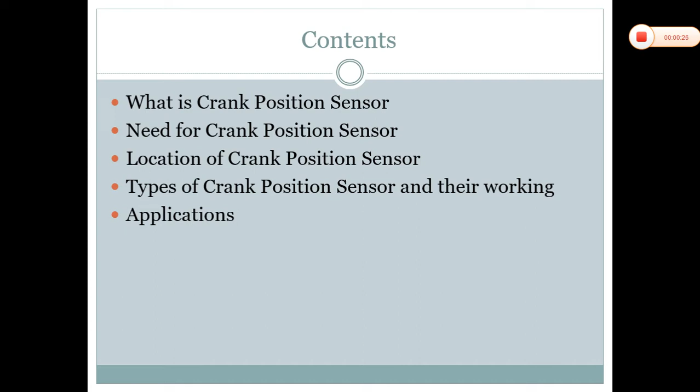So, what is a crank position sensor? A crankshaft position sensor is an electronic device used in an internal combustion engine to monitor the rotational speed and the position.

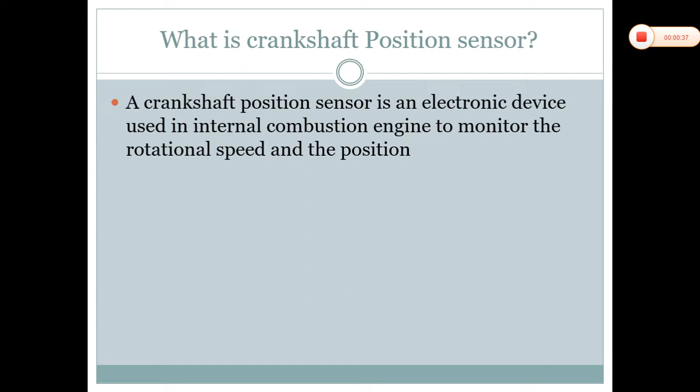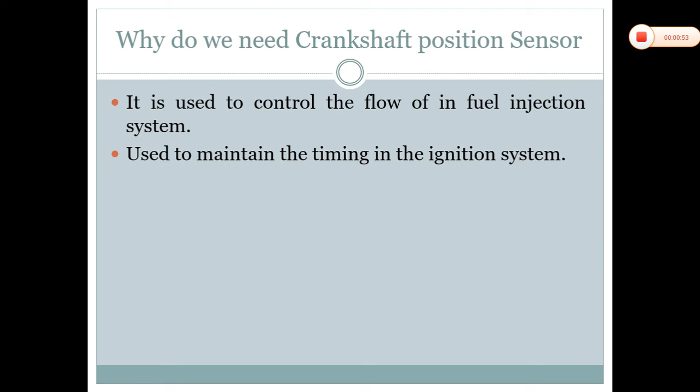Next we'll see the need for this crank position sensor. It is always used to control the flow of fuel in the fuel injection system and also to maintain the timing in the ignition system.

Now we'll look into the location of the crankshaft position sensor. It is typically located on the front of the engine on the timing cover, and the sensor body is placed in front of the engine.

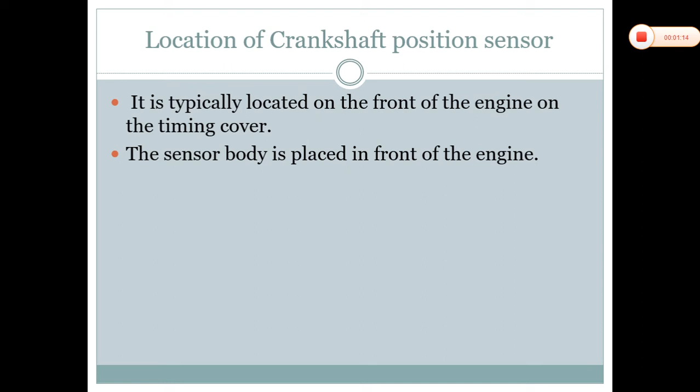When we look into the types of crankshaft position sensor, there are almost three types: Hall effect sensor, inductive type sensor, and the optical type sensor.

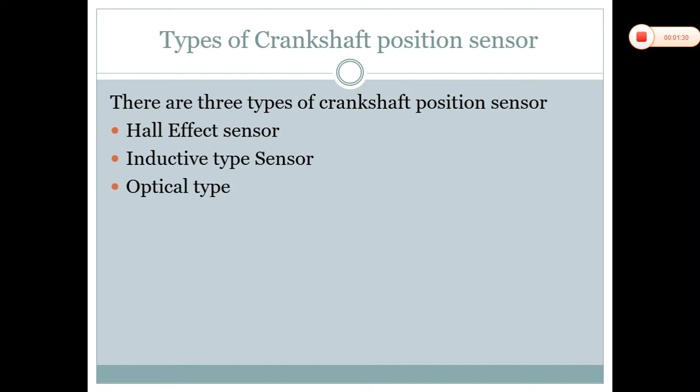The first one is the Hall effect sensor. I'm not going to explain the Hall effect sensor because one of my friends, M. Devi, has very clearly explained it in the link given below. Whoever wants to know about this sensor clearly can go through that link and learn about it. Now, next we are moving on to the inductive type crankshaft position sensor.

This inductive type crankshaft position sensor is extensively used in automotive industries right now. Now we look into its construction. This crankshaft position sensor consists of a toothed wheel and a sensor body, and this sensor body internally consists of a winding coil placed between a magnet.

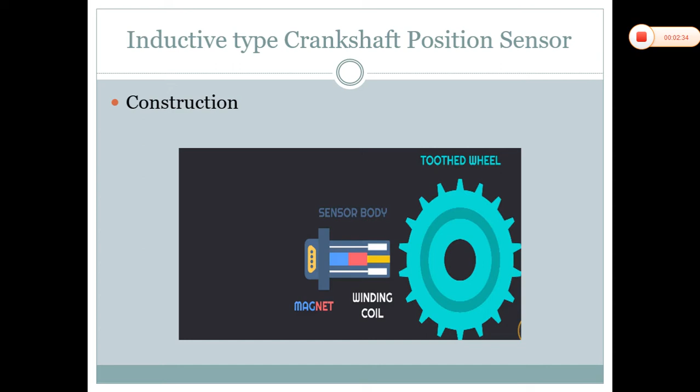Now we'll look into the working of the inductive type crankshaft position sensor. It looks something like this: whenever this toothed wheel starts rotating, the permanent magnet present in the sensor body generates a magnetic field, and as the toothed wheel rotates, it deflects the magnetic field produced by the permanent magnet.

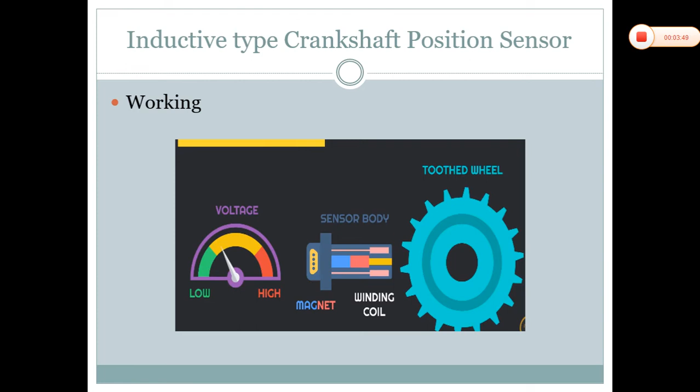Whenever this magnetic field is deflected by the toothed wheel, this deflection creates an EMF in the winding coils. This generated EMF can be observed on the voltmeter, and this voltage is converted into pulses and fed to the ECU, so that based on the pulses generated we can control the rotational speed or measure the position. This is how an inductive type crankshaft position sensor works.

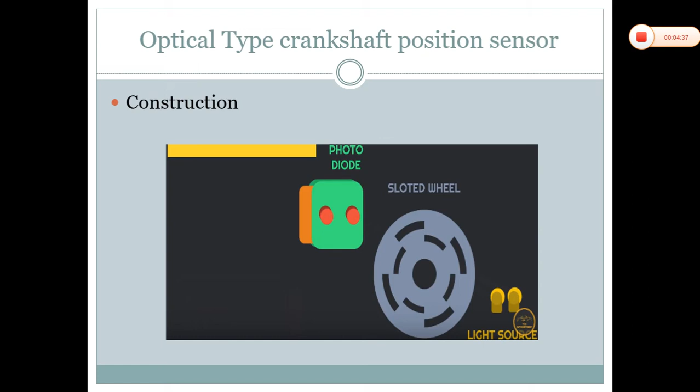Now we'll look into the working of this optical type crankshaft position sensor. Whenever power supply is given to the light source, a light beam is generated, and this light beam is made to pass through the slotted wheel, from which it falls onto the photodiode.

As we know, we have a pair of photodiodes, and this pair will generate different voltages when light falls on them. To clearly explain, we know the working of a photodiode: it converts the amount of light fallen on it into voltage.

So whenever the slotted wheel is rotating, it deflects the light, and this deflected light alternately falls on the pair of photodiodes. Whichever photodiode receives the light converts it into voltage, and these voltages are observed on the output monitor.

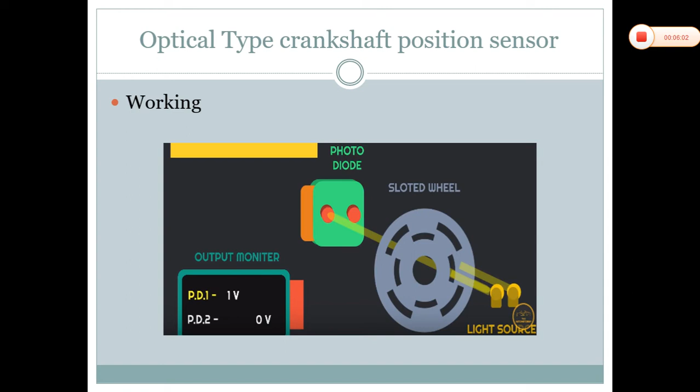These output voltages which are generated are converted into pulses, and then these pulses are fed to the ECU so that we can measure the rotational speed and the position. This is how an optical crankshaft position sensor works.

Now let's see one of the applications of this crankshaft position sensor. We know Mercedes-Benz is one of the top class companies, and one of its engines, the M161 engine, uses an inductive type crankshaft position sensor in its ignition system.

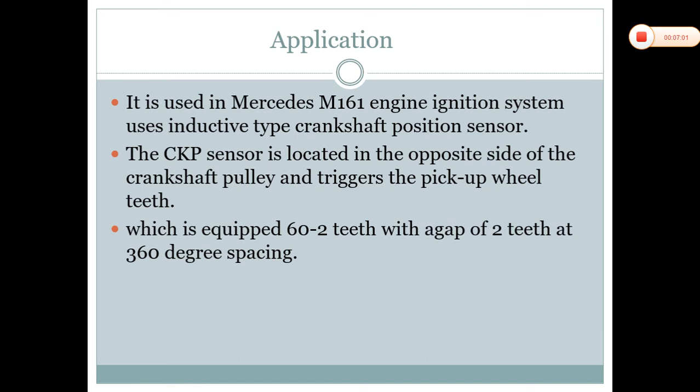This crankshaft position sensor is located on the opposite side of the crankshaft pulley, and triggers the pickup wheel tooth, which is equipped with 60-2 teeth with a gap of 2 teeth with 360-degree spacing. It means the toothed wheel should normally consist of 60 teeth, but here it consists of only 58 teeth, with 2 teeth left as a gap. This is how the construction diagram of the crankshaft position sensor in M161 looks.

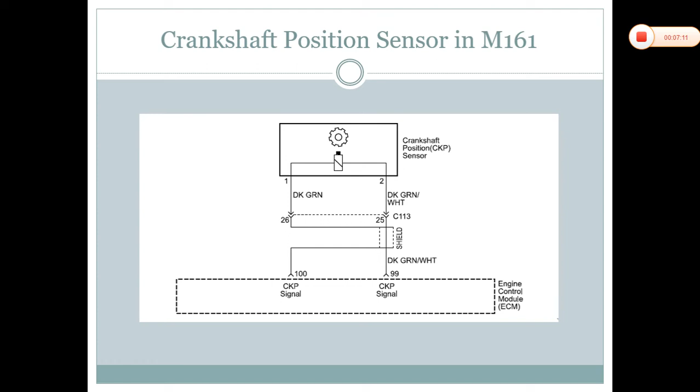Let us go into the working of this. The crankshaft position sensor present in the M161 engine provides a reference signal of 58 teeth. As I told you, there will be a space of 2 teeth gap, so the remaining 58x reference signal is produced by the crankshaft position sensor. During one crankshaft revolution, 58 crankshaft pulses will be produced. The ECM uses these 58 pulses as a reference signal to calculate the engine RPM and position.

The ECM constantly monitors the number of pulses on the 58x reference circuit and compares them to the number of camshaft position signal pulses being received. If the ECM receives an incorrect number of pulses on the 58x reference circuit, a failure code will be set.

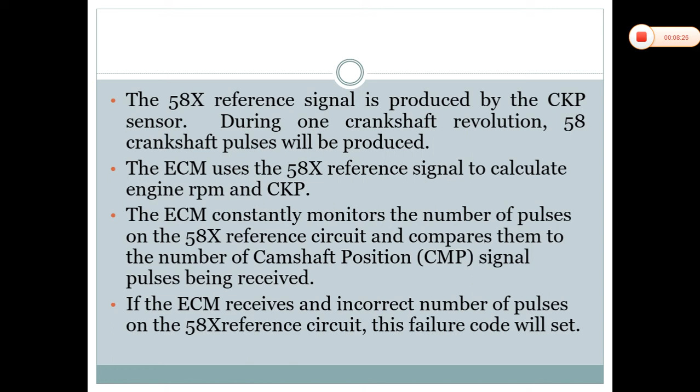Now let us look into the different failure codes used in the M161 engine. This table explains the different sorts of failure codes. If the failure code is 17, that represents a signal failure of the crankshaft position sensor. What is the trouble area? Even though the cam position recognition is normal, no crankshaft position signal is recognized.

Now when we look into failure code 18, what happens here is the RPM of the engine is greater than the maximum value. Now we look into the trouble area: when more than applicable revolution values are implausible to 60-2, it means it is getting more than 58 pulses than the reference signal.

Now let's look into failure code 20. It means a gap recognition failure. What happens here is the 2-tooth gap which is present in the pulley is not getting recognized, and that causes an error.

Now let's look into failure code 67. Till now we have seen that pulses are not getting recognized or the spaces are not getting recognized. Now, even though the pulses are recognized, the sensor position is not getting recognized. This error is caused because of the crank angle of the sensor.

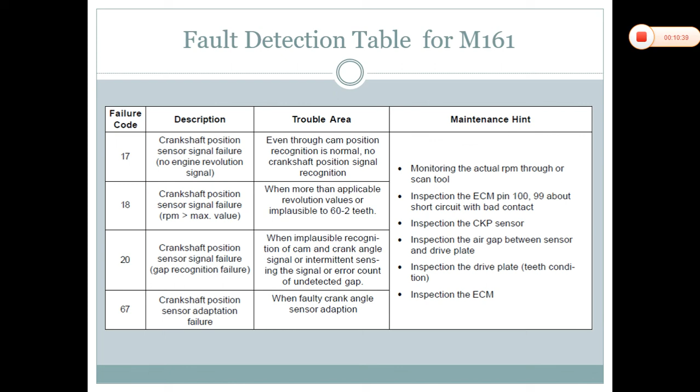The maintenance hint for all these types of failure codes is almost the same: monitoring the actual RPM through the scan tool, inspection of the ECM pin 100, 99 about short circuit with bad contact, inspection of the crankshaft position sensor, inspection of the air gap between the sensor and drive plate, inspection of the drive plate, and inspection of the ECM. Now let's get into some of the inspections.

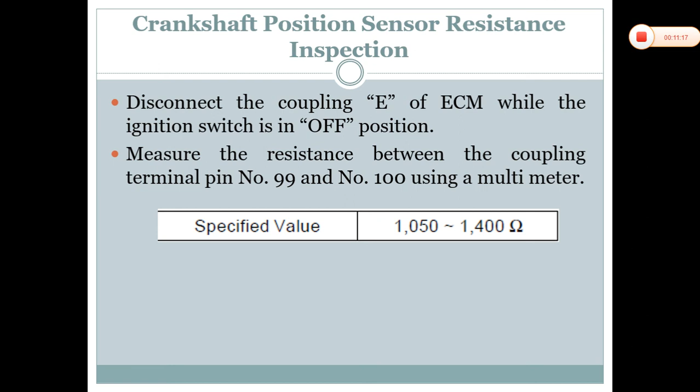Now we are going to look at sensor resistance inspection of the crankshaft position sensor. We disconnect the coupling of the ECM while the ignition switch is off, then measure the resistance between the coupling terminals pin number 99 and 100 using a multimeter. If this value lies in the range of 1050 to 1400 ohms, that is fine. If there is an error, that can be found out with this.